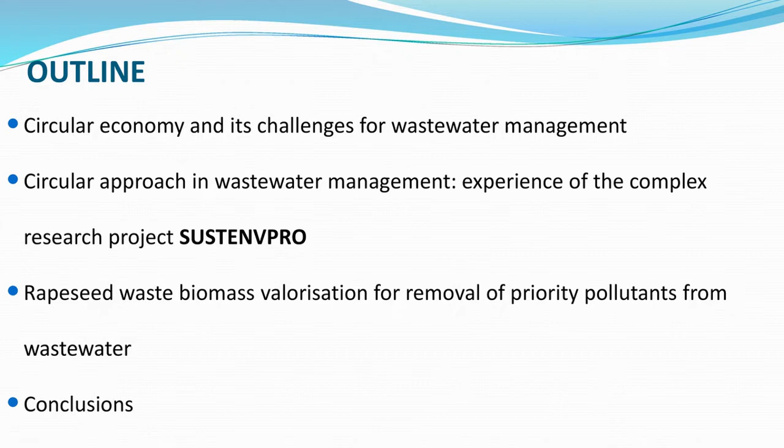This presentation will actually be based on our research in a group that I coordinate at the Technical University of Iași. And we are going to talk about the challenges of circular economy applied for wastewater management, then something about our experience in the complex research project SUSTENVPRO, a few things about the experimental work for using waste biomass for removing priority pollutants from wastewaters, and a few conclusions.

When we are talking about circular economy, the tendency is to think about zero waste and also the use of waste as resources. And there are a few concepts that are very important, such as the consideration of products and processes from the manufacturing to consumption and recycling. So this design of processes and products with the use of a biodegradable component or a component that has 100% recycling potential, or the sustainability principles that are applied all over this circle, and the life cycle thinking assessment and management.

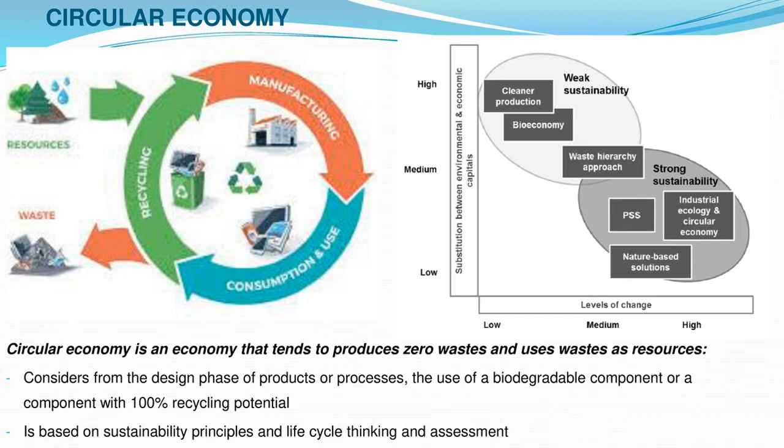From the point of view of the systems, the circular economy approach is providing, let's say, strong sustainability in terms of concept, but also in terms of results. When we are talking about wastewater management, we are talking about very complex systems from two points of view, from the natural system point of view, but also from the anthropogenic system point of view. And we have based all our research on the water use cycle approach, which is considering the water from abstraction up to discharge or recycling, with the phases for drinking water treatment or industrial water treatment, then wastewater collection, wastewater treatment, and finally what can be done to safely discharge the wastewater or to reuse it.

So apart from all the constraints and the challenges that we have related to the natural system, that are impacts, risks related to climate change events and so on, we also are facing some constraints related to the anthropogenic systems, and one of them that is very important is the fact that we have various stakeholders with various interests and various backgrounds that are expecting information and decisions within these systems.

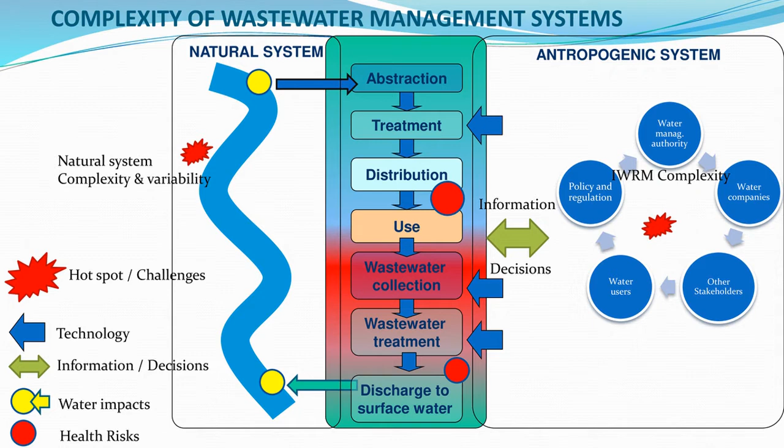Talking about the circular approach in wastewater management, there are mainly three types of approaches that are at the moment used. That is wastewater recycling and reuse after advanced wastewater treatment for industry supply, for irrigation, for urban use, or for other uses. Another approach is considering the waste materials that are used in various wastewater treatment processes, or the wastewater sludge valorization for resources or for energy recovery.

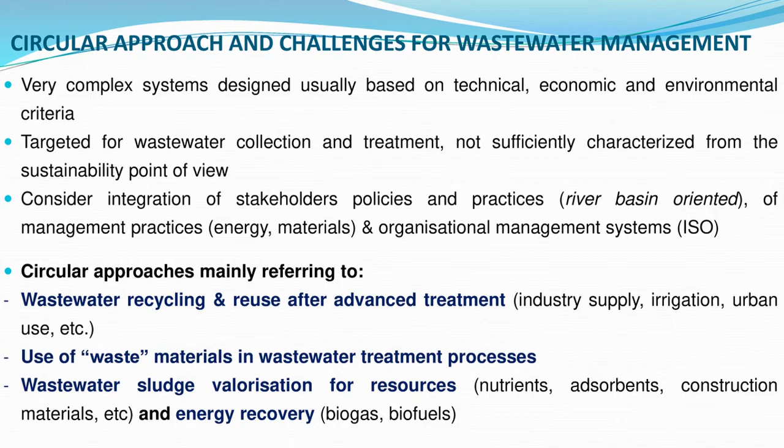From this point of view, if we are talking about the wastewater line and the advanced wastewater treatment processes, we see that as far as we go within the improved wastewater quality, we will find a variety of processes from conventional treatment, like mechanical treatment, physical-chemical treatment, biological treatment, but more important when we are thinking about recycling and reuse of wastewater, we are considering advanced treatment.

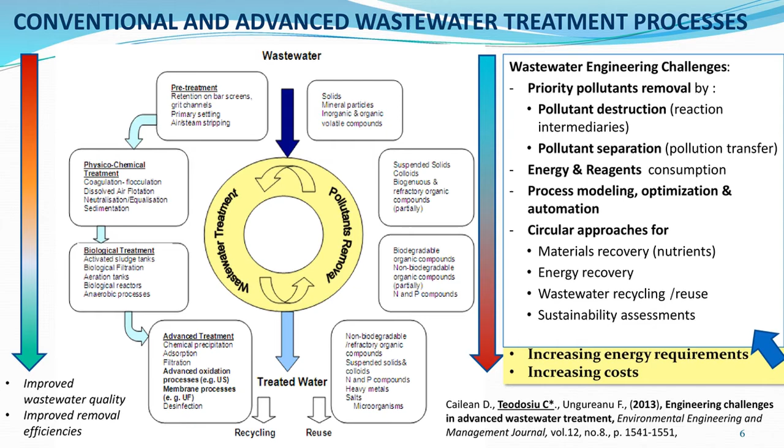And as far as we go on the treatment line, we will obtain better wastewater quality, better removal efficiencies, but we will also encounter within this process technical challenges, problems about costs, and most important, energy requirements that are increasing, and other types of issues like the sustainability assessment of these systems. From this point of view, basically, I have tried a bit to tell you, let's say, the overall background.

From this point of view, we have started when we conceived this project. It is a complex research project that is called SUSTENVPRO as acronym. Actually, the full name is Integrated and Sustainable Processes for Environmental Cleanup, Wastewater Reuse and Waste Valorization. It is a project that we are implementing in a consortium formed of 6 partners.

We are leading this project, but we have as partners Politehnica University of Bucharest, Politehnica University of Timișoara, Petru Poni Institute of Macromolecular Chemistry from Iași, Alexandru Ioan Cuza University in Iași, and the National Research and Development Institute of Environmental Protection from Bucharest. So all coming with various research experiences, all coming with a very interdisciplinary background.

Our project objective is focusing on the increase of institutional performances of all institutions in the environmental field. We are trying to consolidate our research in partnership. We are trying to consolidate collaboration, and apart from the senior researchers, we are trying to get into research and to train young researchers.

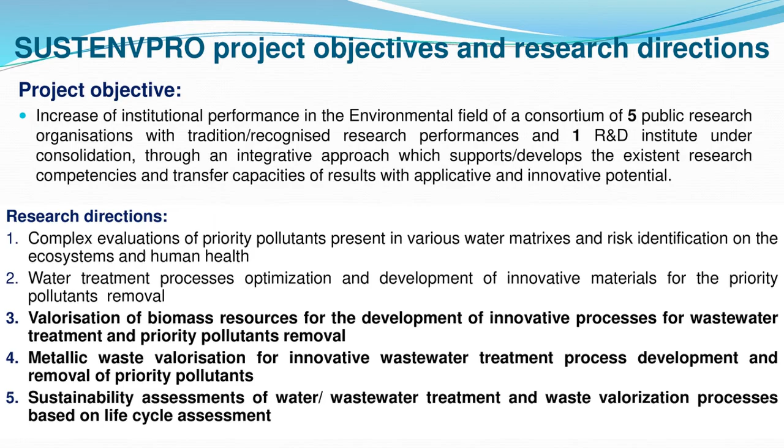We are focusing our research within 5 component projects that are running in parallel. This is quite tough. And from this point of view, the projects are standalone projects focusing on quality of surface water that is supplied for drinking water treatment, then drinking water treatment innovation and use of different materials that will make the process more efficient, wastewater treatment, and finally, we have this project that is dealing with sustainability assessment that is connected with all the other component projects.

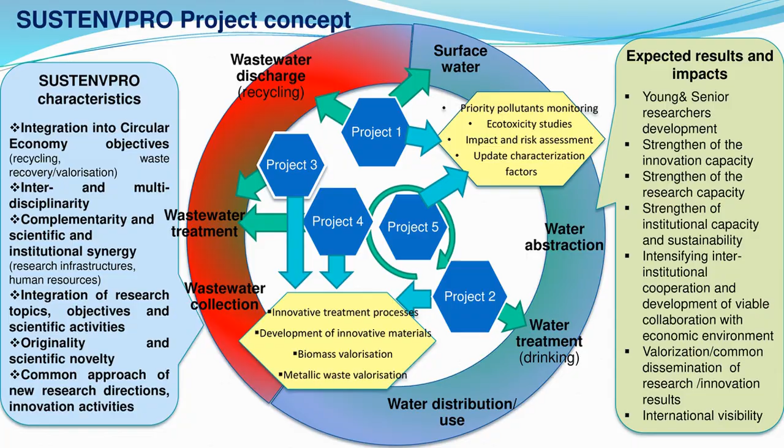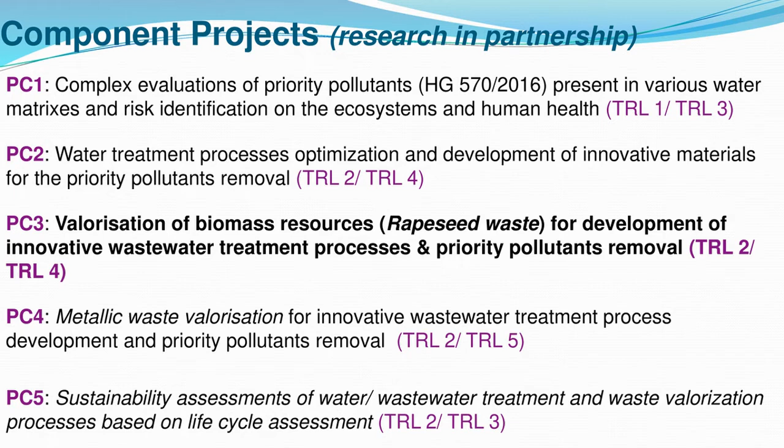And this is a bit the introduction until the valorization of rapeseed waste for wastewater treatment. We have used rapeseed waste because it's coming from oil or biodiesel manufacturing processes. There is quite rapeseed production in Europe, but not only in Europe, also in other countries like China, Canada, India, and so on. And the rapeseed has several particularities that confer it the quality of a low-cost biosorbent. So the lignocellulosic fibers and proteins provide functional groups like carboxyl, hydroxyl, and amine that make the biosorption process efficient through various mechanisms, either through ion exchange or complexation or electrostatic interactions and so on.

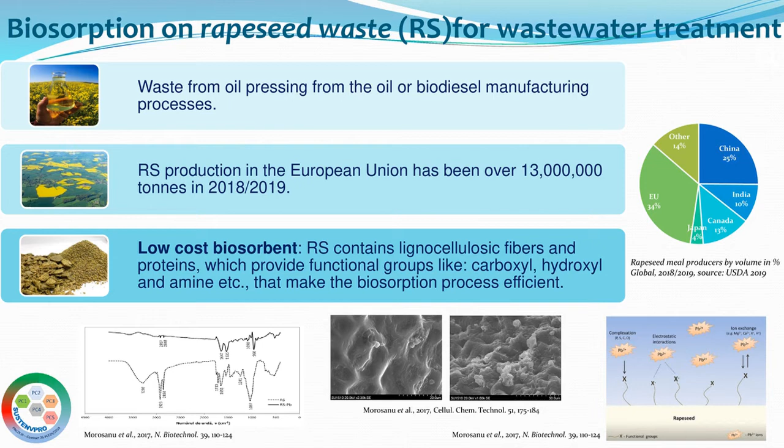We have started our experiments from 2 target priority pollutants, the lead ions, which is a heavy metal, and the Reactive Blue 19 dye. This is an anionic dye, both components usually being encountered in industrial wastewaters, but not only. The experiments started from the single biosorption processes, then moving towards sequential biosorption, simultaneous biosorption, and we have tried in all the cases to start from establishing the equilibrium conditions, then moving on to kinetics, of course, characterizing the materials, and afterwards determining the selectivity and other removal efficiencies and so on.

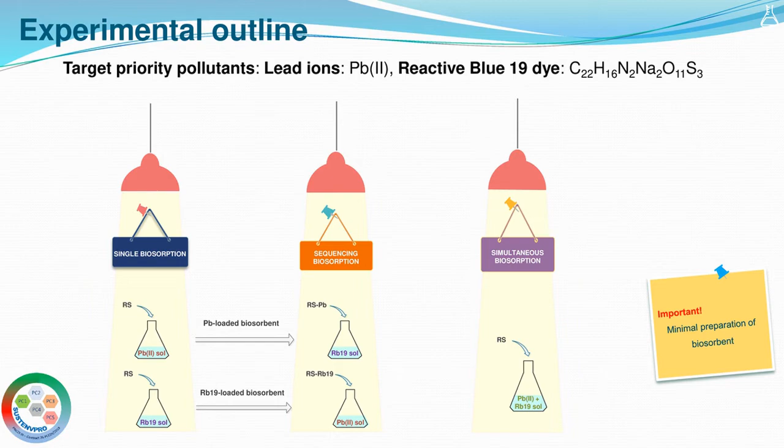It is important also to mention that we have tried to use the waste with a minimal preparation, because we have considered that a very complex or difficult use of the waste would make the process more difficult. You see here the layout of the sequential biosorption processes. We have tried to approach these kinds of processes in various ways, trying first to adsorb on the rapeseed the lead, and then the dye. On the other hand, we have also made experiments adsorbing the dye first and then the lead. It is important to mention that we have tried to be as much as possible in the pH range of wastewater treatment as it is in the plant. And also we have tried to use initial concentrations as much as possible at the level usual for advanced wastewater treatment.

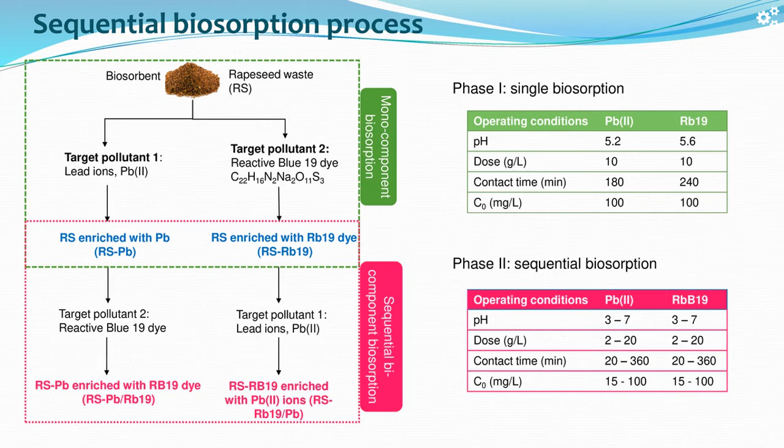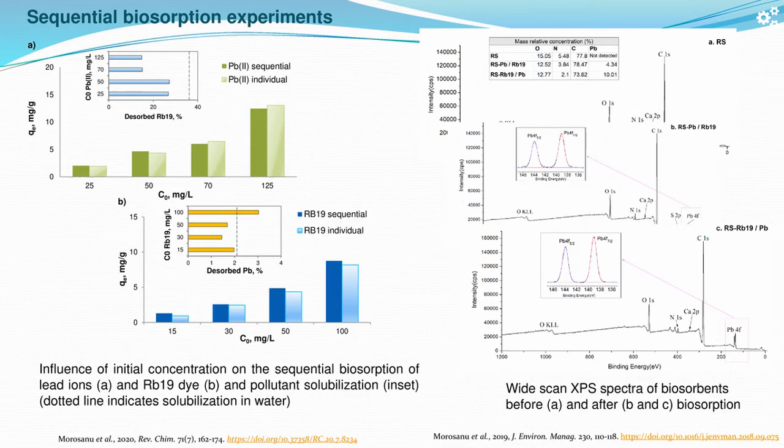In the sequential biosorption processes, we observe that the increase of lead concentrations also favors biosorption. From this point of view, we may observe that sequential experiments are quite similar to individual experiments, and from the X-ray photoelectron spectroscopy we can also observe that both the lead and the dye are absorbed into the biosorbent.

For the simultaneous biosorption, our idea was to go closer to the real wastewater treatment applications. Usually wastewaters have quite a number of pollutants inside, and we have tried to approach, let's say, the real cases, of course still doing a lot of experiments with the equilibrium, the kinetics, the selectivity, and the desorption studies.

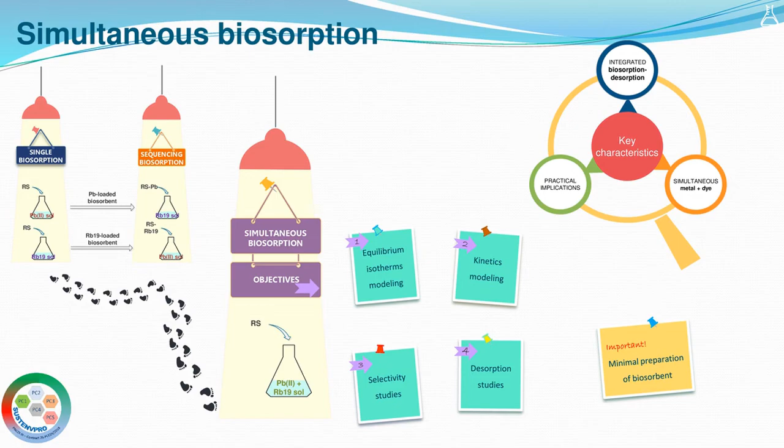From this point of view, it is important to mention that selectivity is an important issue in wastewater treatment when we are using biosorbents. Selectivity studies showed us that at higher concentrations the selectivity is not really very good, while when we have, let's say, moderate concentrations of both lead and dye, we may go for a good selectivity.

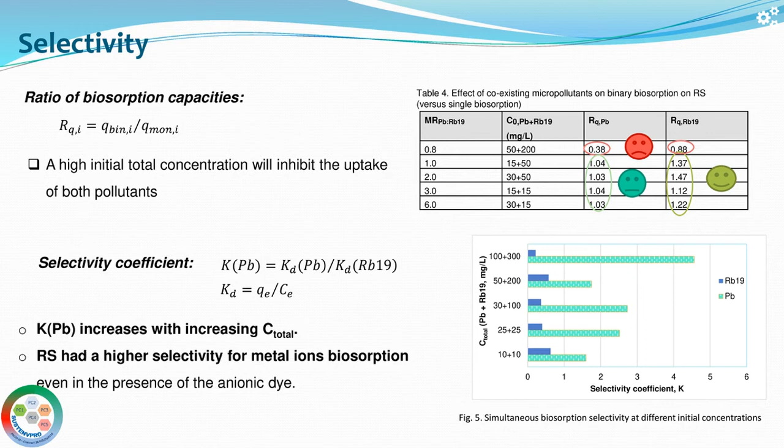What we have also observed in the simultaneous biosorption is that the lead is usually helping the biosorbent to remove more of the dye, which is a fact that we have seen in the sequential biosorption as well.

Comparing them, because we are dealing mostly with very practical questions: comparing the sequential biosorption with the simultaneous biosorption, apart from the minimal preparation and the operating conditions, we observe that there is quite an important removal efficiency both in the sequential process and in the simultaneous process. Both the lead and the dye are removed up to 80-85% or 90-95% for both types of processes.

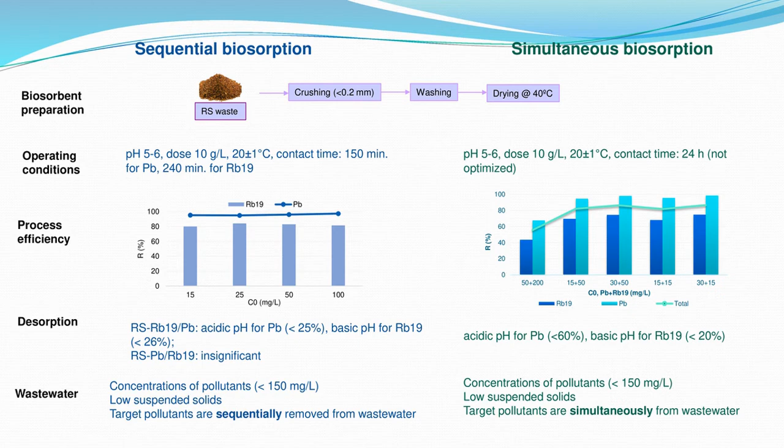It is also important to mention that the biosorbents may be reused, and there are desorption studies that we have undertaken as well. What about the biosorbents? This is an important question because in this kind of process we are transferring waste. We are not destroying the pollutant, we are actually transferring the pollutant to another phase. So what can we do with the biosorbent?

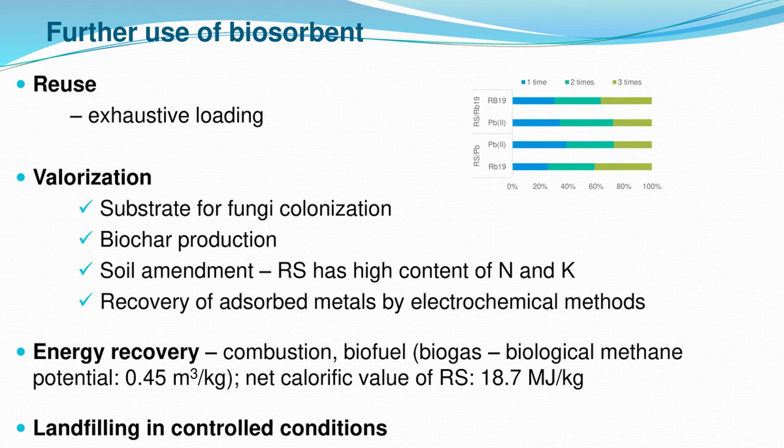We can either use the biosorbent up to its exhaustive loading, as we have seen here in the graph from the sequential biosorption experiments, or we can valorize it as substrate for fungi, biochar production, soil amendment, or recovery of adsorbed metals. We can also do energy recovery, because this biosorbent has quite a good calorific value, and last but not least, landfilling it in controlled conditions.

One of the big issues about the practical implications of the biosorption process is to go from the laboratory scale to pilot scale, and these are the questions that we normally should pose. What would the reactor design look like? Is it batch or fixed bed column? Most probably the wastewater practitioners would prefer a fixed bed column. Then we have the column clogging problems that may be avoided by adding an inert polymeric resin.

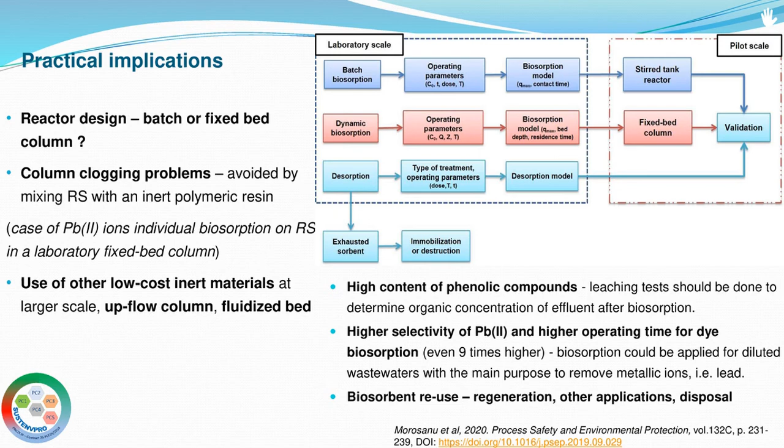We can also think about the selectivity studies done at pilot scale and high operating time. All these kinds of questions are very important when we are preparing the transfer from laboratory to pilot scale.

As a few conclusions, we have based our research on this circular economy approach by using a rapeseed waste for biosorption. We have done it from two perspectives, sequential and simultaneous. We have found that lead is also increasing the biosorbent capacity for a further removal of the organic dye. And we found that the selectivity studies are very important in the simultaneous systems, and they should consider various molar ratios between the metal and dye.

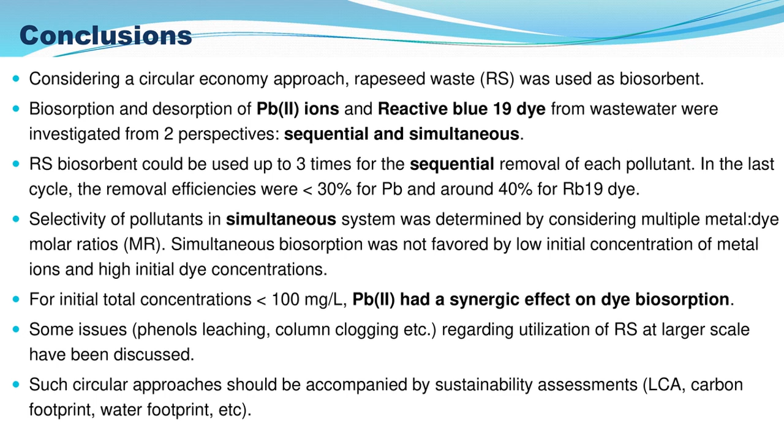Of course, there are the issues of sustainability assessment applied to these processes. That is very important, because if we are thinking only about the technical issues of the process, we are not actually considering the most important principles of the circular economy approach.